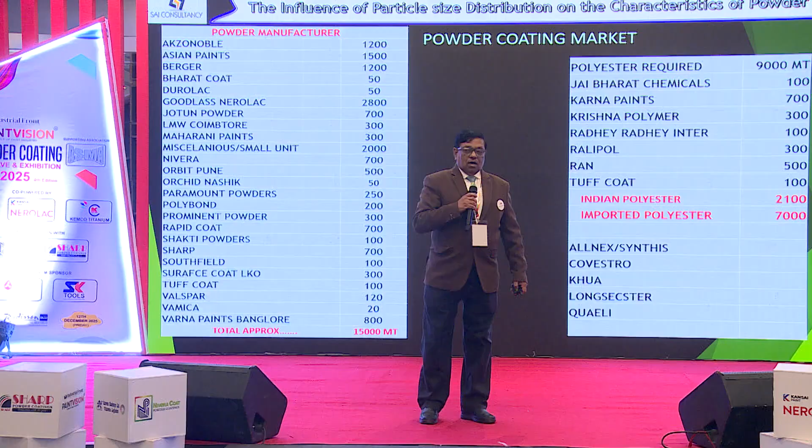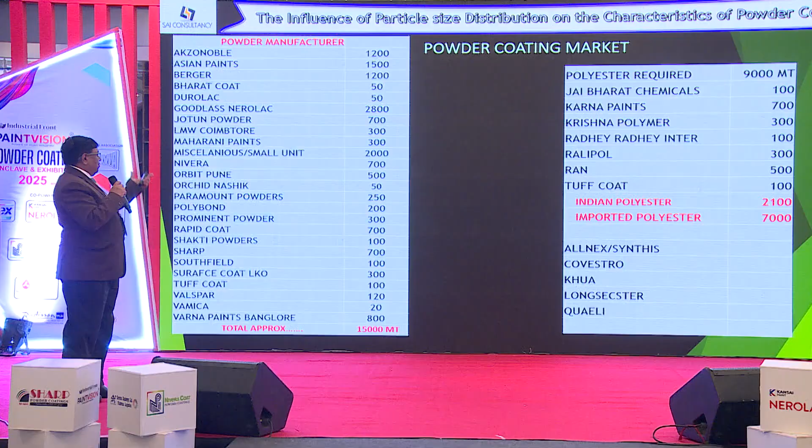Indian powder coating market: roughly around 15,000 tons per month, and polyester resin 2,000 tons per month indigenous, and around 7,000 tons imported. These both are used, and there is a big gap between Nerolac and others. Nerolac is doing very well. Maybe this is a near figure, not exact. Maybe 100 tons more, 100 tons less, like that.

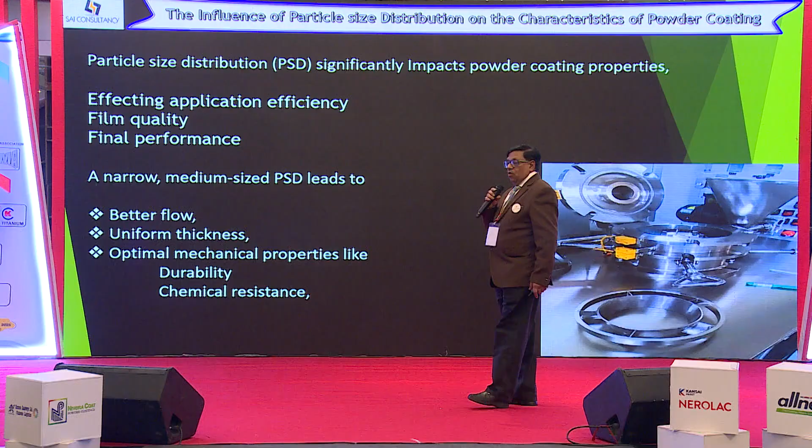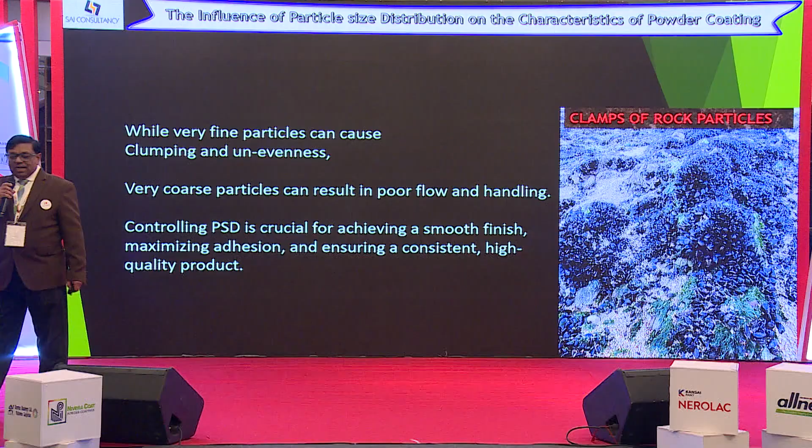So particle size: the whole powder is not of a single particle size, it is a particle size distribution. So it affects application efficiency, film quality, final performance. A narrow, medium particle size gives better flow, uniform thickness, and optimal mechanical properties, while very fine particles can cause clumping and mishandling. Very coarse powder can give poor flow, like orange peel.

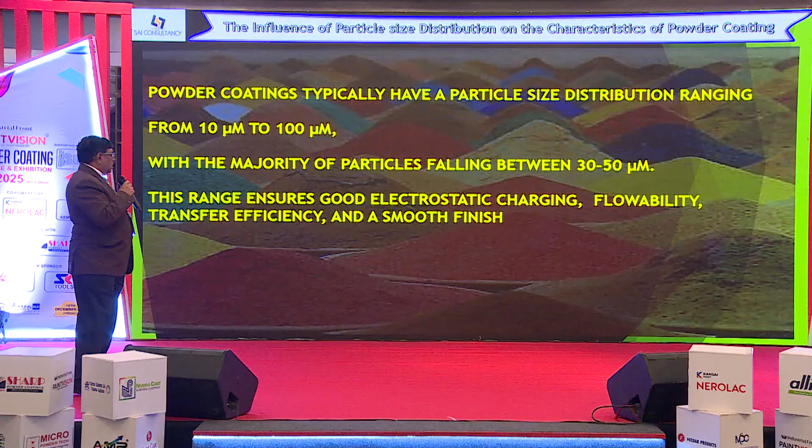In powder coating, typically the particle size should be from 10 micron to 100 micron. This is a range. The major particles should be between 30 to 50 micron. This is data. The optimal range should be 30 to 50. But definitely there are some 5 micron, 10 micron, 80 micron particles.

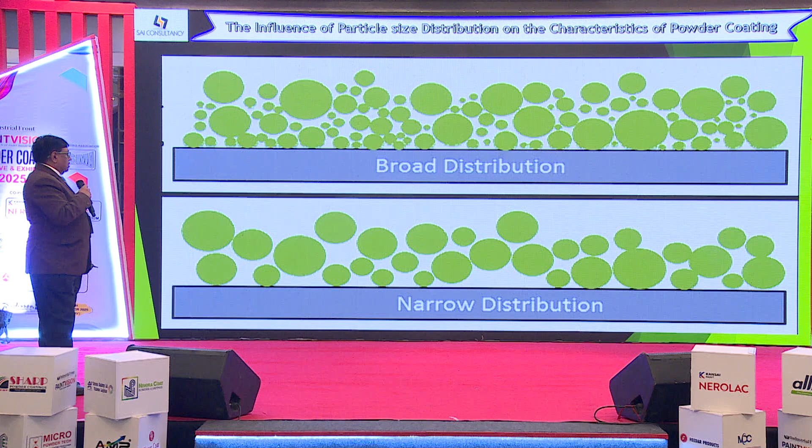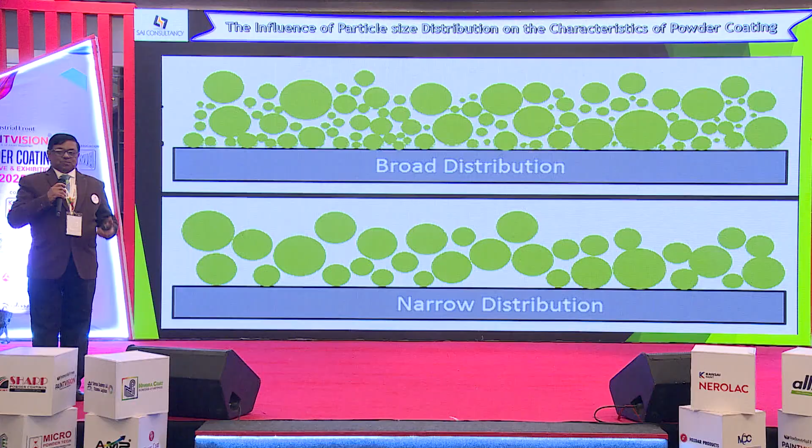Can we have a video, please? Please start the video. This is a video on Malvern particle size. वीडियो स्टार्ट करा दी वहाँ से. हाँ ठीक, ओके.

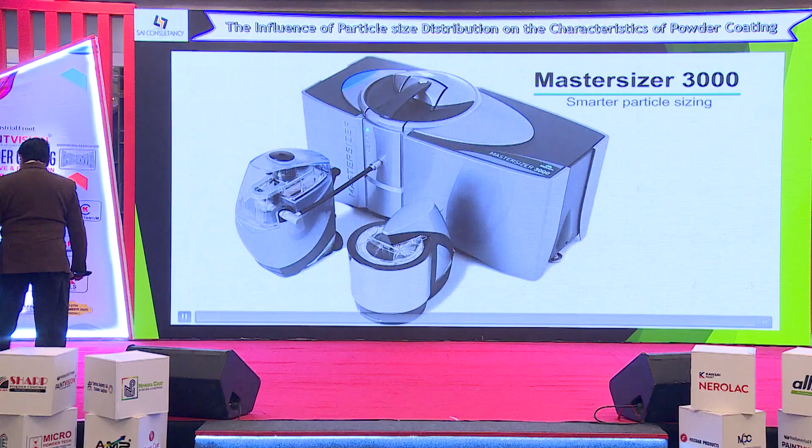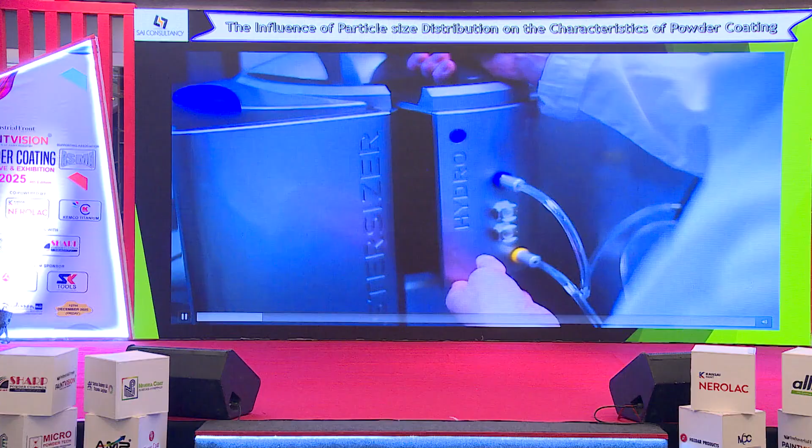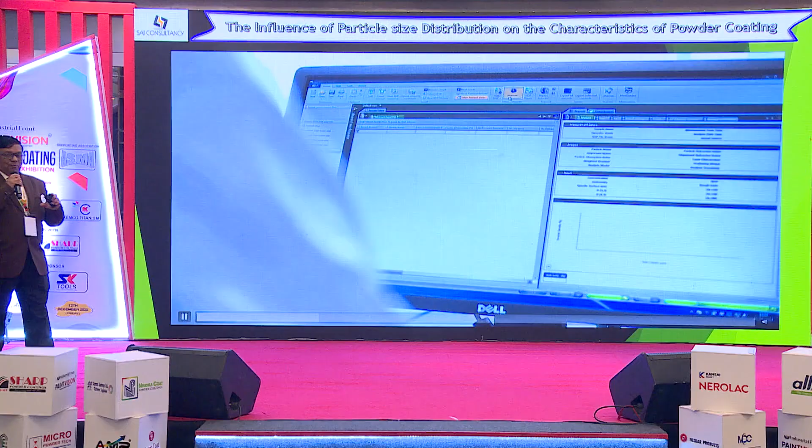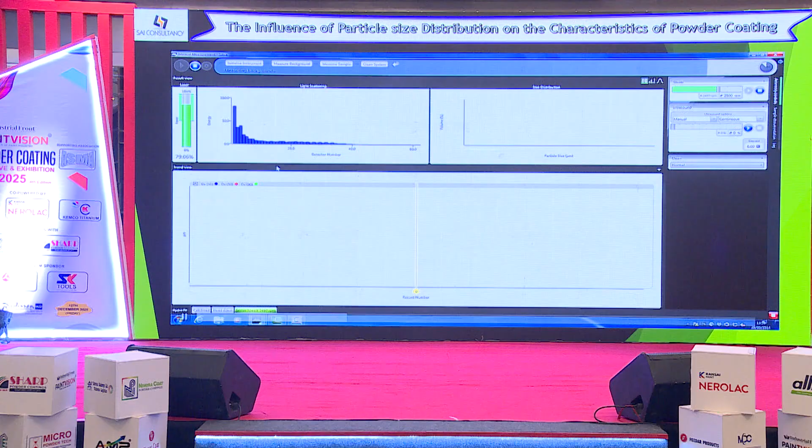The Mastersizer 3000 is the world's leading laser diffraction particle size analyzer. It has been developed not only to enable robust and rapid particle size measurements over a wide 0.01 to 3,500 micron range, but also to bring Malvern's application knowledge and expertise right next to you in the lab. Reproducible and reliable particle dispersion is ensured by a wide range of sample dispersion units, which enable the measurement of dry powders, suspensions and emulsions. The measurement manager provides a view of everything you need to understand and optimize the measurement process.

Method development requires a user to select the optimum dispersion settings to achieve stable, reproducible results. Live feedback shows when the sample concentration is suitable for measurement. This shows the decrease in particle size during dispersion, until the size stabilizes and there are no more agglomerates. Switching from liquid to dry dispersion is easily achieved by simply changing the Mastersizer 3000's measurement cell.

When this occurs, the software automatically detects that a new sample type will be measured and configures the system ready for dry dispersion. Dry measurements offer the ability to quickly measure larger volumes of sample. The sample tray and hopper can be configured to control the flow of different types of material. Other trays are available to handle smaller sample volumes.

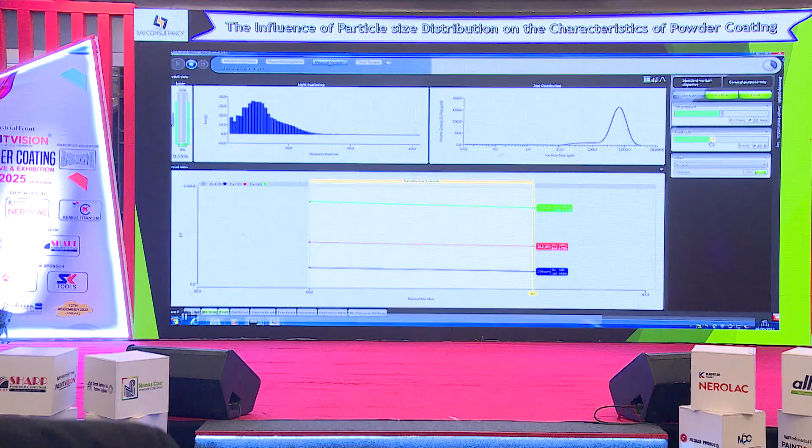As with liquid dispersion measurements, the Mastersizer 3000 Measurement Manager is used to guide you through the dry measurement process. Once the sample feed starts, the software automatically triggers the measurement. Live reporting of the results is then provided, so you can be sure that the measurement is operating optimally. The measurement runs until all of the sample is measured, ensuring representative results are obtained.

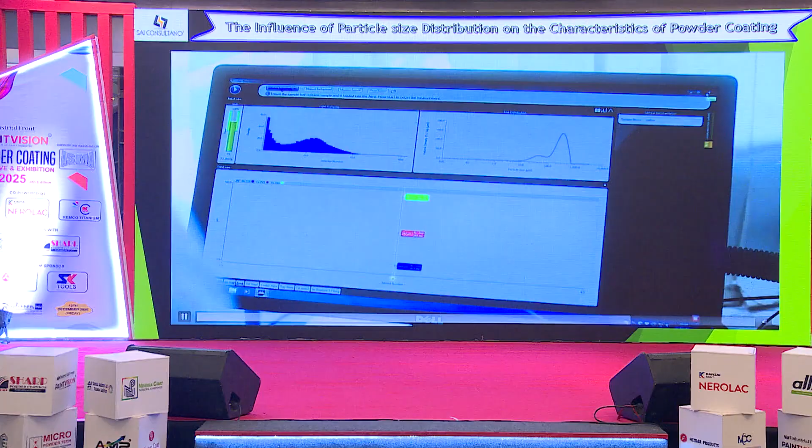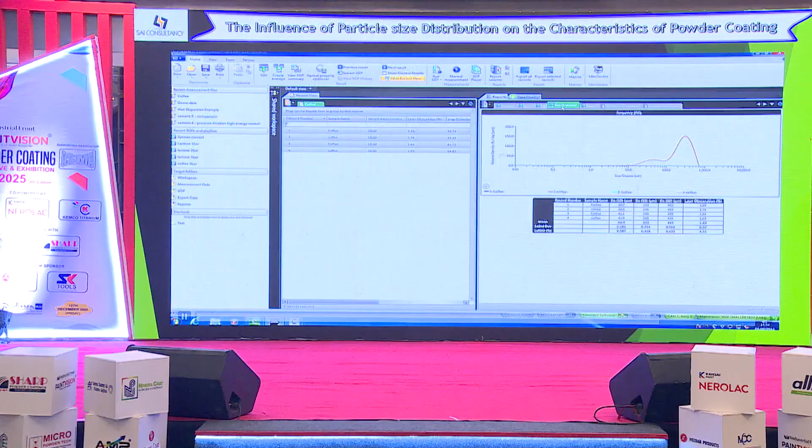Once the measurement is complete, the results can be displayed within the software's record view. Here, any number of sample reports can be stored, enabling you to report the particle size parameters which fit best with your application. From research and development through to routine QC measurements, the Mastersizer 3000 is the workhorse particle sizer.

Now, this is the effect on application.

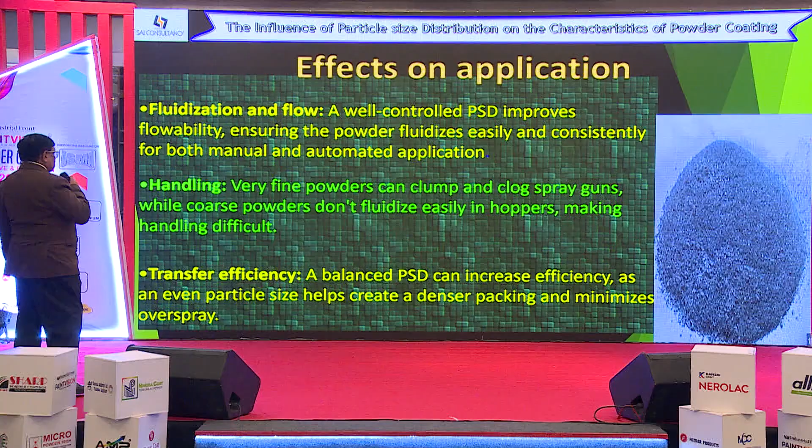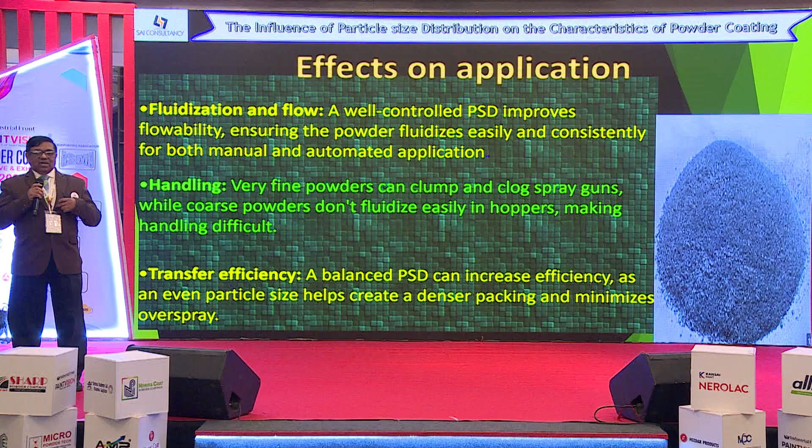The fluidization and flow. This is not the pure film flow, this is free flow properties. So, a well-controlled particle size distribution is there. The flowability, the powder fluidization in the gun hopper, it will be better, and consistency can be easily achieved. Then handling will be very good. Then transfer efficiency: most of the powder will transfer from the gun tip to the substrate.

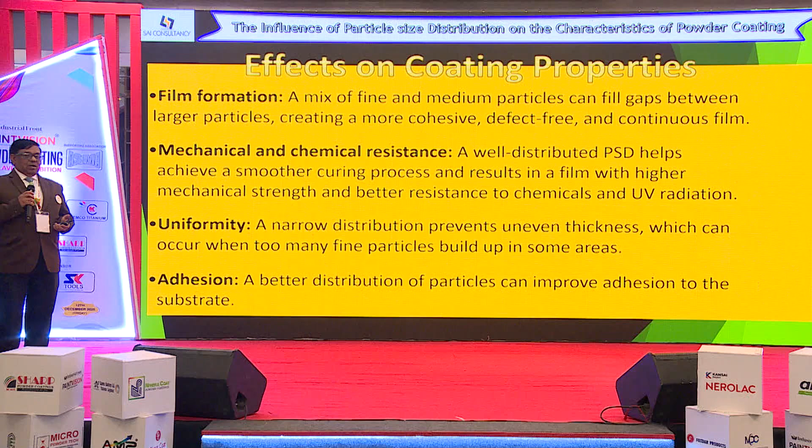The effect on coating properties, this is on the cured film. So the film formation: an optimized mix of the fine and coarse powder gives a better, smoother film, because some fine powder is also required. Then mechanical and chemical resistance: when the film is smooth, there are no pores, so chemical and mechanical properties will be better. Then uniformity and adhesion with the substrate will be better. Yes.

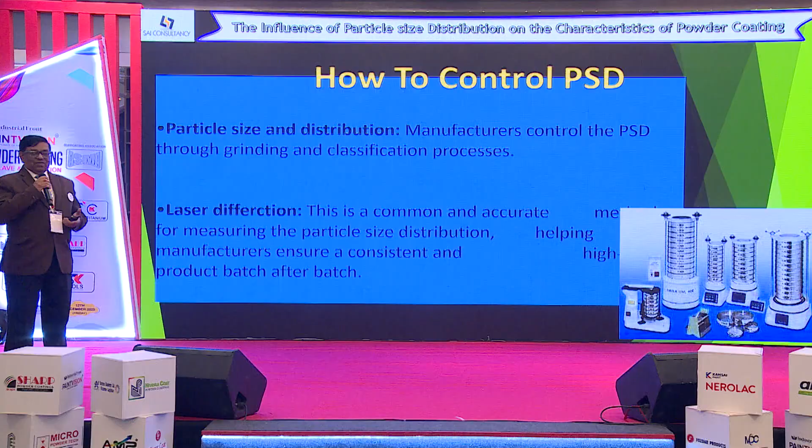How can we control the particle size distribution? The manufacturer controls the PSD through grinding, meaning the grinding parameters and the classifier parameters. This I'll discuss later. You have just seen the laser diffraction machine for particle size. There is another method, very good: sieve analysis by the Alpine air jet sieve. That video is also coming.

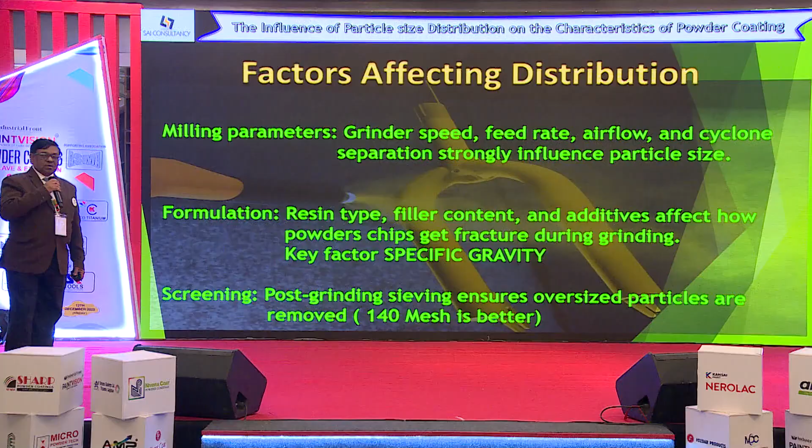So these are the factors affecting the properties of the powder. The milling parameters, meaning ACM parameters: the grinder speed, the feed rate, the airflow rate of the mill.

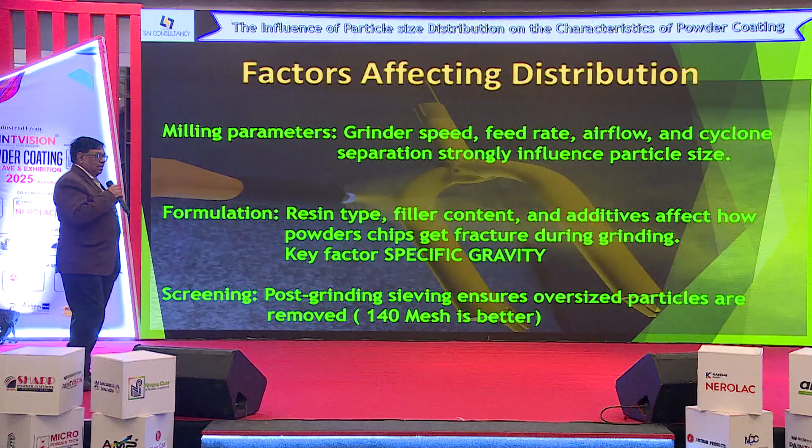Then cyclone separation strongly influences the particle size. Then formulation: definitely the choice of the resin and the choice of the fillers. Choice means the particle size of the fillers, that is also very important. And the resin for better flow and smooth finish is different. For structure and texture, the resin is different, with slightly more viscosity.

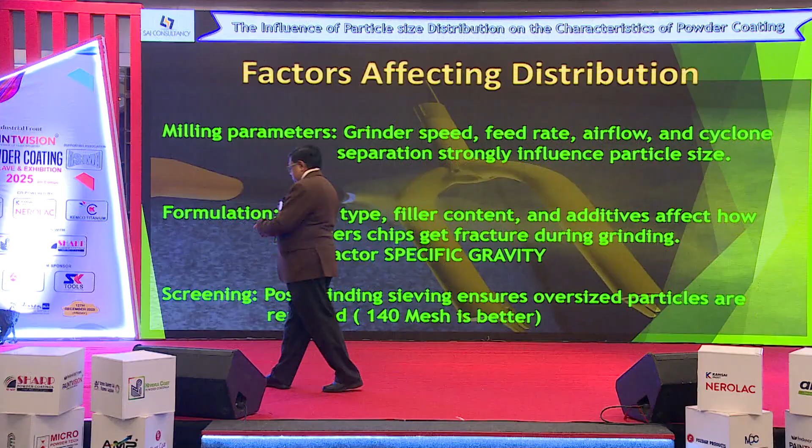Then of course, after grinding, we sieve the powder to separate the coarse powder from the required particle size. So that sieve analysis is there. This photograph I especially put over here. Normally an ACM has only one cyclone. This one has two cyclones, one here and another here. The benefit: the fine powder going to the dust collector can be collected with the secondary cyclone and reused on the extruder, because it is a single color, no mix of colors. And the required powder you get on this sieve.

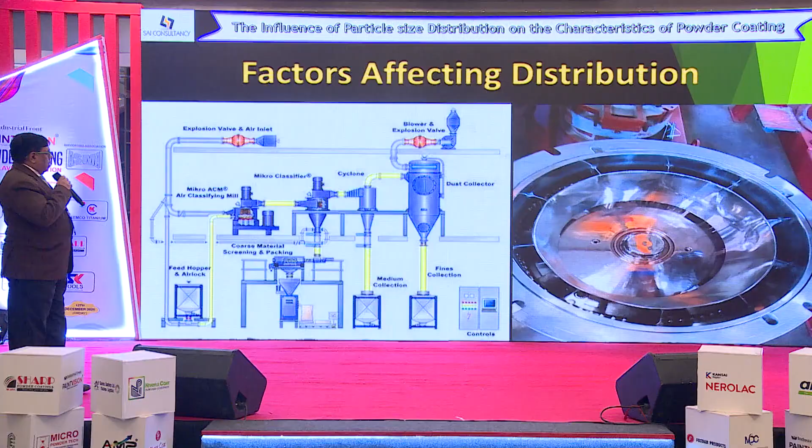So you're looking into refining or buying an Alpine, but something important to think about is, what sieves are there? Will they work? Will they better my operation? Well, stick around and I'll tell you everything you need to know.

Hey there, my name's Andrew Kotlar, and sometimes regular sieves just don't cut it. If you're struggling with heavy particle agglomeration, the Alpine E200 LS can revolutionize your process. But it all comes down to sieves, right? Well, W.S. Tyler has been in the particle size analysis industry for over 110 years, and is here to make sure you have the best particle analysis setup possible. That's why in this video, we'll go over what an Alpine E200 LS is, the benefits of an Alpine air-jet sieve, and the sieves used on an Alpine.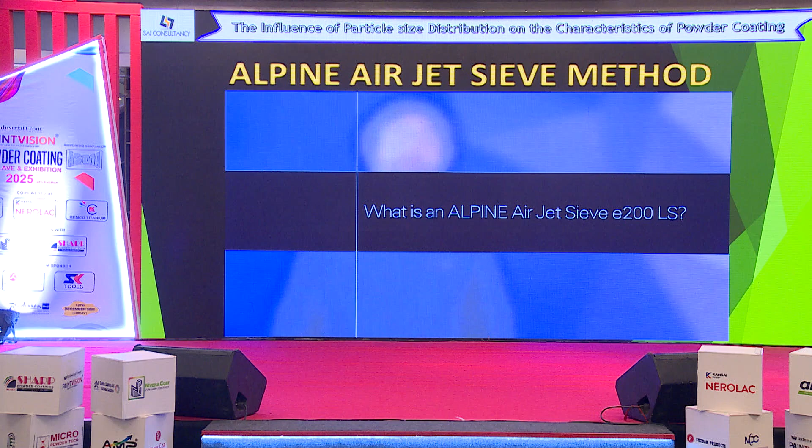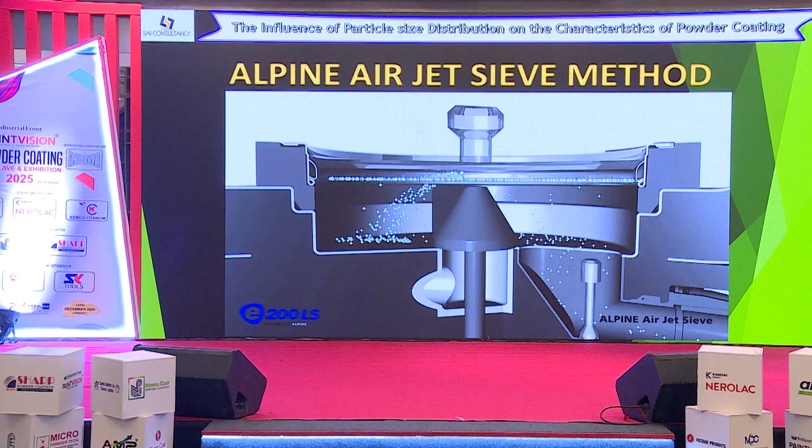An Alpine air-jet sieve is a unit that uses air generated from a vacuum to separate particles. After placing the test sieve in the air-jet, a nozzle rotates 360 degrees while using air to push the particles around. The air-jet is very useful with particles that agglomerate. Since the air-jet pushes air through the sieve, the particles collide with the plexiglass lid, which disperses them. This allows the smaller particles to fall through the mesh opening. And like the goal of all sieves, only the larger material will be left on top after the air-jet sieve finishes its cycle.

One of the benefits that separates an air-jet sieve from traditional gravity-driven test sieve shakers is that air-jet sieves can be connected to a scale unit. You can weigh your pre-batch sample before you run your material, and once you've collected this info, you can run your test. This will provide you with your new sample distribution, which you can weigh on the scale to get the new sample weight. Then you can easily export that to your network, to a printer, or store it directly on the Alpine for later analysis.

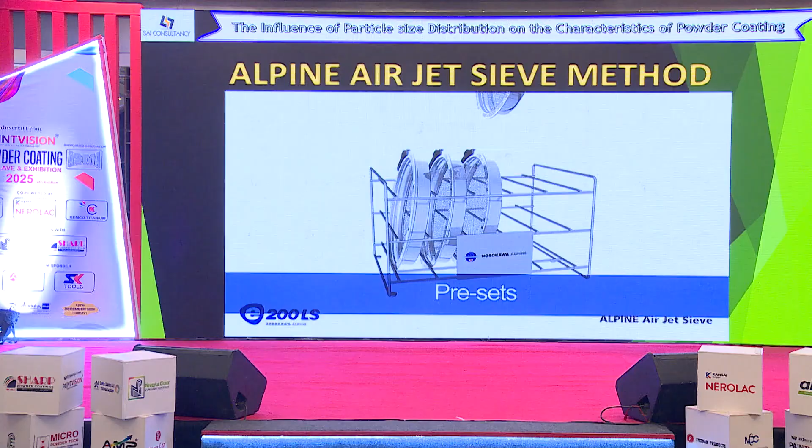Another benefit of the air-jet sieve is accountability and traceability. The Alpine only operates when each user logs into an account to run a test on the unit. This test is then saved and recorded under that user's name. This has become significantly important in the pharmaceutical industry to be able to trace approved analysis back to the user. The Alpine air-jet uses specific test sieves that you can pre-program to each type of material you test in your lab. For instance, if you run charcoal or limestone through your sieve shaker, you can have a preset for each material to remember the exact settings and levels you need for the material.

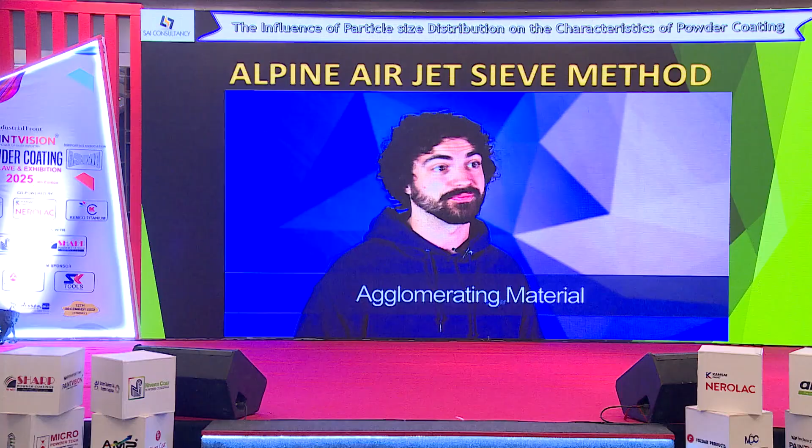Like I said before, maybe the biggest reason for using the Alpine is for agglomerating material. If you're comparing the Alpine to a regular sieve shaker, the airflow inside an Alpine does a much better job at separating individual particles that tend to agglomerate compared to the simple rotate and tapping motion from a sieve shaker.

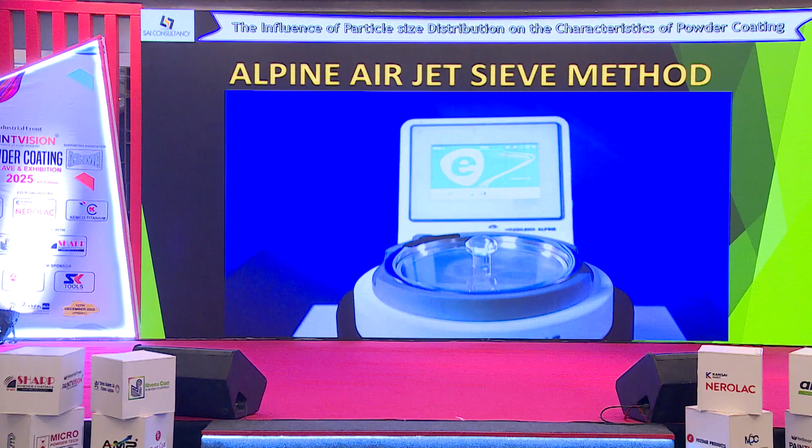The air-jet sieve E200 LS has specialized sieves with pre-programmed RFID chip technology. The RFID stores the mesh size, number of uses, and serial number. They are 200 millimeter in diameter, their overall height is 1 inch, and the depth to the cloth is 7/8 of an inch. Stainless steel sieves from 20 micron down to 4,000 micron with RFID technology eliminate potential contamination and save having to manually input the sieve mesh width every time.

But you can also use a standard 8-inch test sieve without an RFID chip if you purchase the compatibility adapter. The standard sieve is 200 millimeter in diameter, the overall height is 1 3/4 of an inch, and the depth to the cloth is 1 1/8 of an inch.

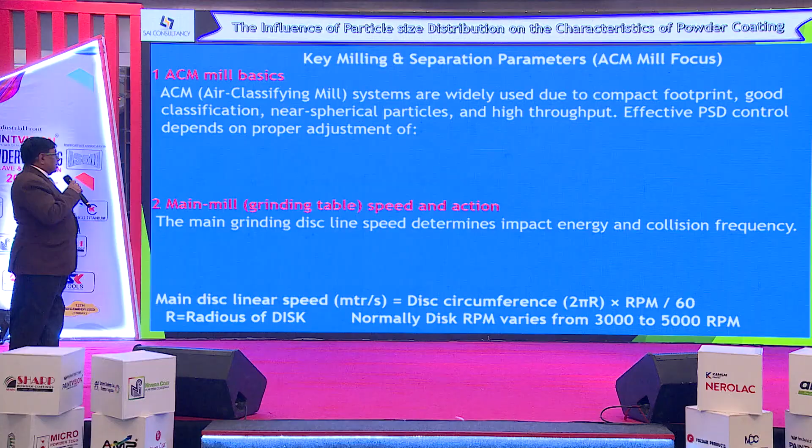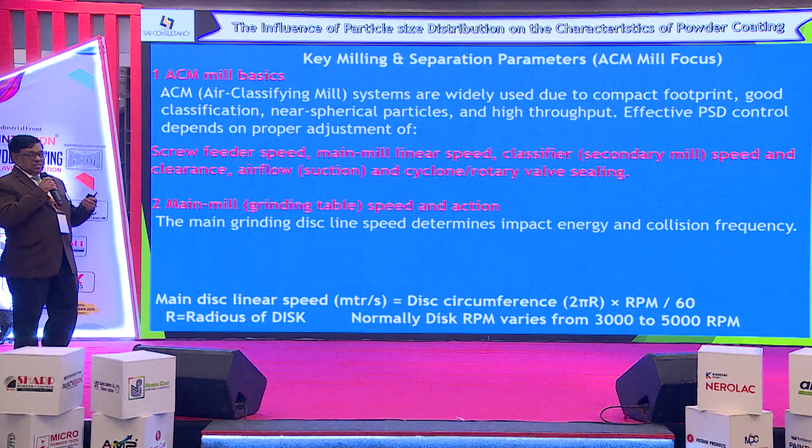Now these are very important parameters. The key milling and separation parameters: the ACM mill basic, the system widely used due to its compact footprint, this air classifying mill. The important thing is the screw feeder speed and main mill linear speed. This is linear speed, actually you have to convert. Normally it is rotational speed, RPM.

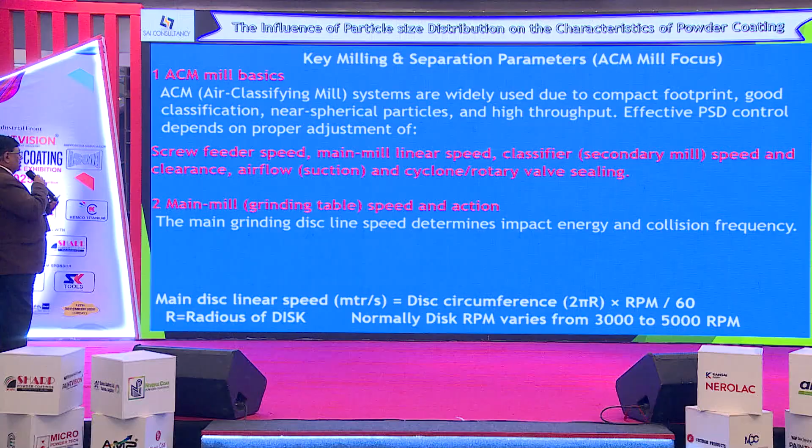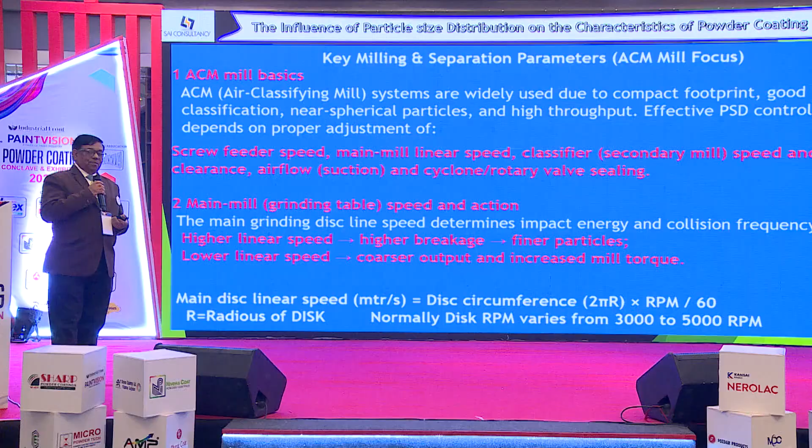So the airflow, these are the basic parameters. Then main mill: the higher linear speed, higher breakage, fine particles. And if lower linear speed, definitely lower RPM, so coarse powders are there. This is an equation to convert rotational speed into linear speed.

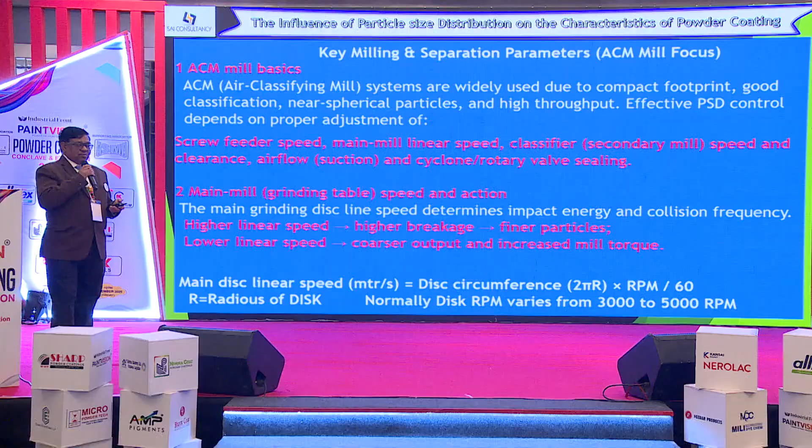Then the classifier, and the gap between the classifier pins and the lid of the ACM where the chips are grounded. It is very typical, it should be 2 to 3 mm. If it is too large, more than 3 mm, suppose 5-10 mm, the powder will be coarse. And if it is very low, it will be excessively fine. And sometimes your powder chips get soft, so it may clog the mill also.

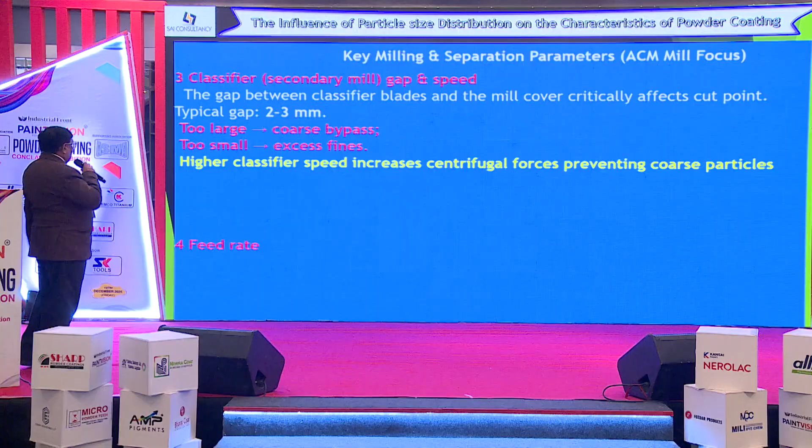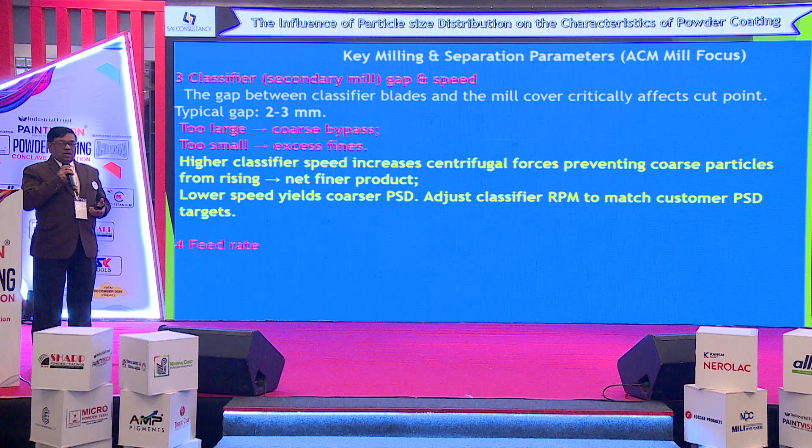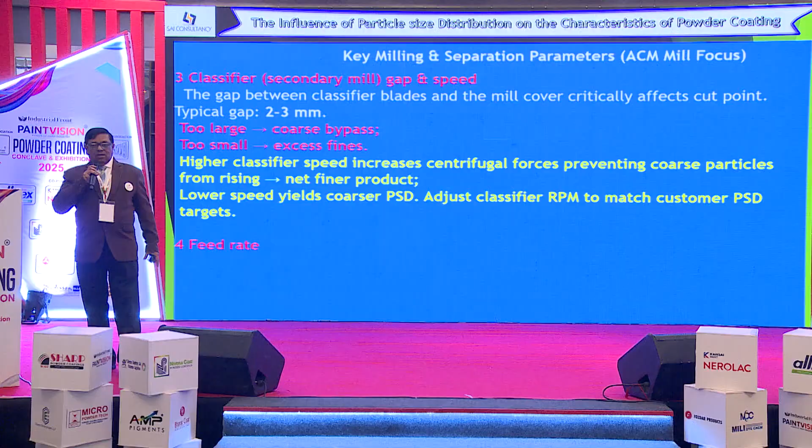The higher classifier speed increases centrifugal forces, preventing coarse particles. So again and again, the coarse powder particles will come into the grinding zone, and when it gets the proper particle size, it will come up. जितने भी हमारे ACM हैं, you know the total grounded powder is conveyed from the milling zone to the dust collector through pneumatic. जो हमारा लास्ट में blower लगा हुआ है वो पूरा suction करता है.

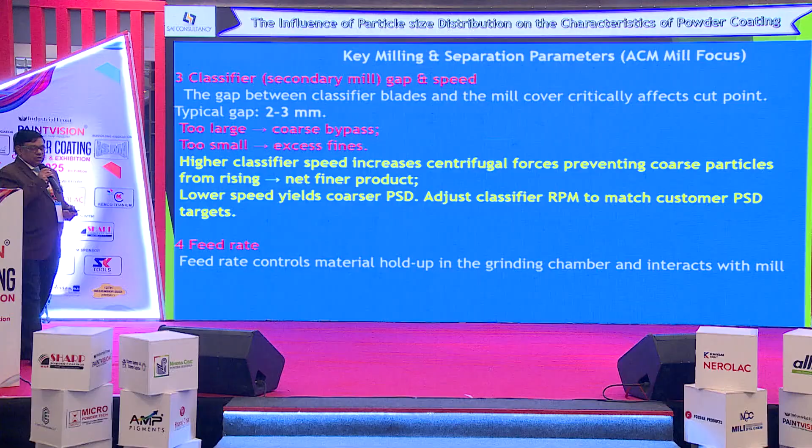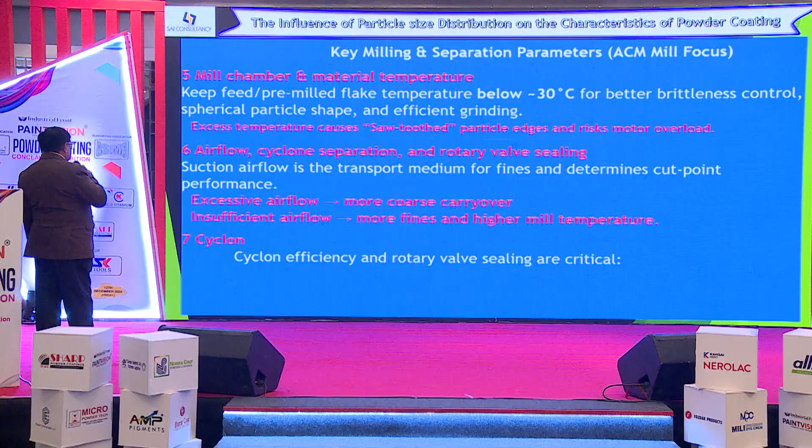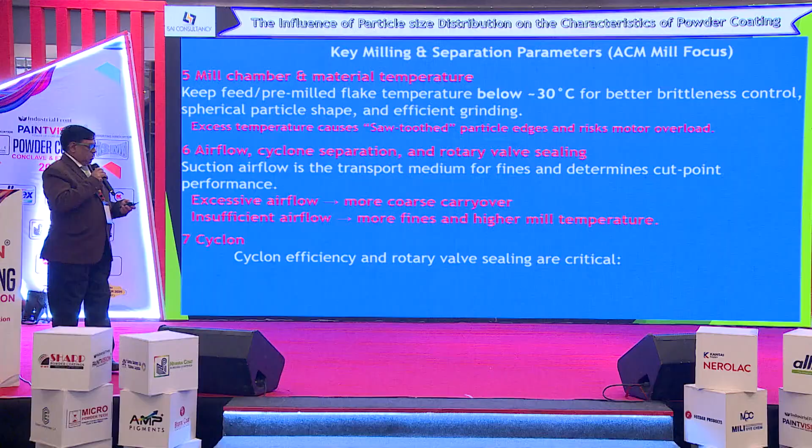So excessive airflow also, airflow means air suction generated by blower. If it is more, you will get coarse powder, and if it is less, you will get fine powder. Then same cyclone में आजकल तो flap portion चालू हो गया है, butterfly valve, but sometimes a cyclone rotary airlock is also used. So उनमें जो gap है, अगर वहाँ से air suction है, leakage है, तो again you will not get the proper particle size.

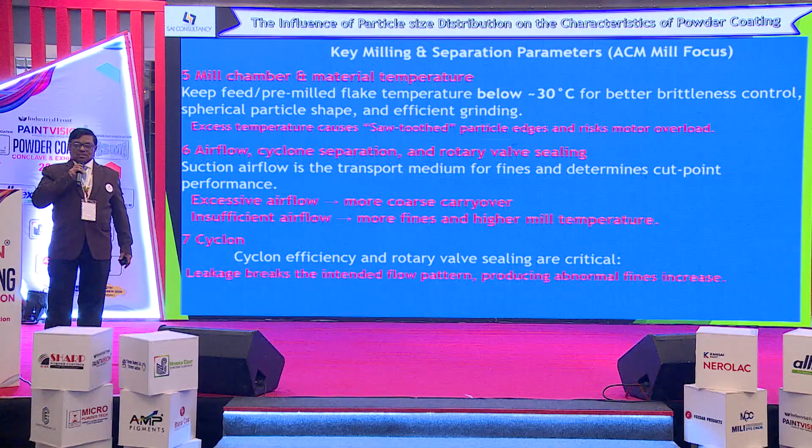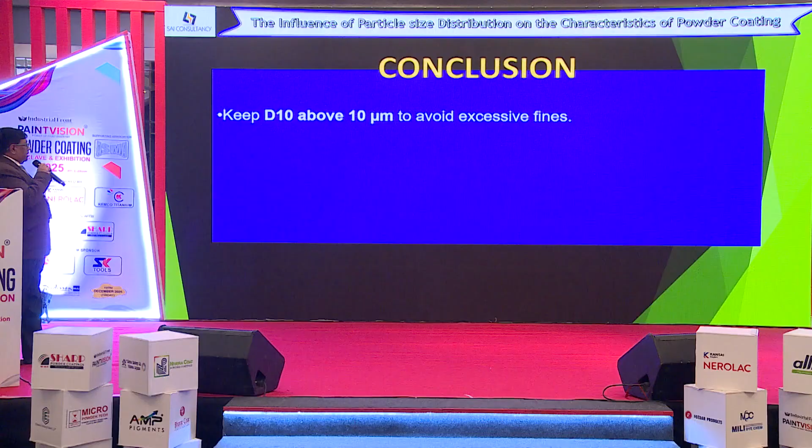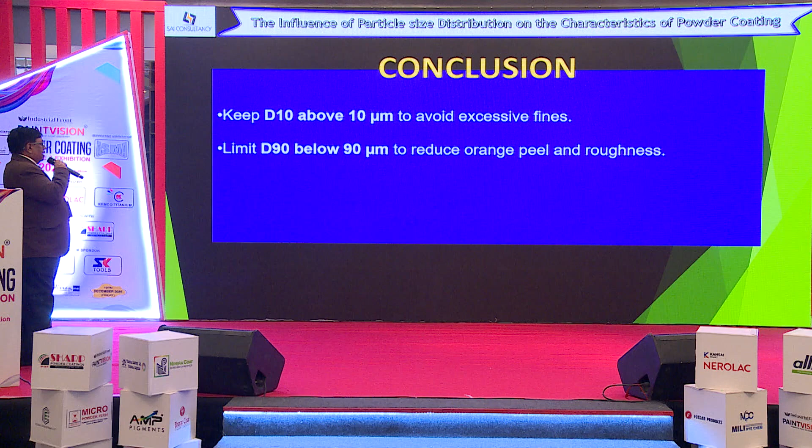So this is the conclusion. Keep D10 above 10 micron. Below 10 micron, very less powder should be there. Then D90: more than 90% should be below 90 micron. The optimal D50, this is very important, is the average particle size. It should be 35 to 45 micron.

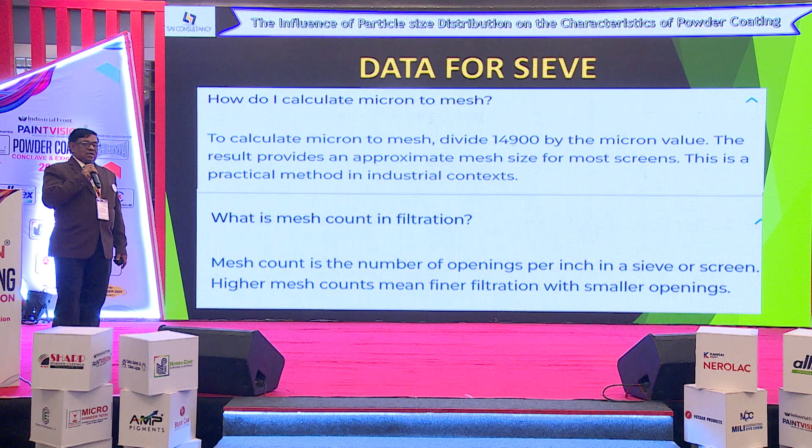These are some basics. कैसे micron को mesh में convert करेंगे. To calculate mesh, divide 14,900 by the micron value, you will get mesh size. This is very important.